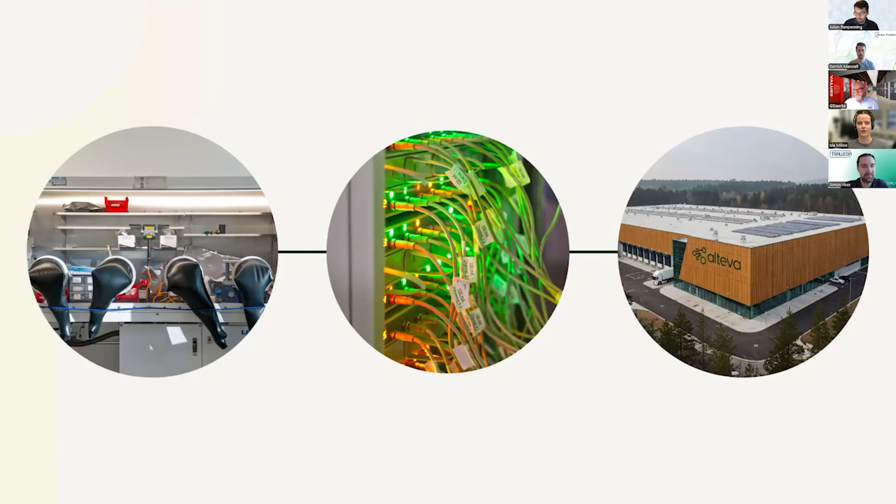So what we do really is take these next generation battery technologies and make them scalable. Basically, take what we have in the lab now and then step by step go into larger scale production until we reach these gigascale factories, because that's really what we think we can make a difference on here in Europe if we have domestic battery production again.

And the kind of technology we are looking at for these next generation batteries, especially lithium-sulfur batteries. I'm not sure how many people here are familiar with that technology. There are quite a lot of advantages to using lithium and sulfur as the chemistry of batteries compared to current lithium-ion batteries. The first one is around materials.

We actually have materials that are very abundant and available. Sulfur is one of the most abundant elements in the world. It's a waste product in a lot of industries, so it's cheap and easy to get, also here in Europe. Lithium is also not that much of a problem. So all the things we can get basically here in Europe - lithium, we have to open mines, but this is possible - compared to, for example, sourcing cobalt from Congo and so on. We don't need that anymore.

The second big advantage of lithium sulfur is that they're only one third of the weight of current lithium-ion batteries. So all the applications where weight is crucial can massively benefit from us using lithium sulfur batteries.

And those of you who are familiar with lithium sulfur probably also know the challenges why we don't see that in the market yet. And that is mostly around the lifetime of these batteries. So lithium and sulfur right now can only last maybe 50 cycles if you're lucky in the lab. There are some developments going on, but what we really have developed and what makes the difference is that we have a cathode material that stabilizes the sulfur in a way that we can make it last hundreds of cycles to really make it competitive to lithium-ion batteries.

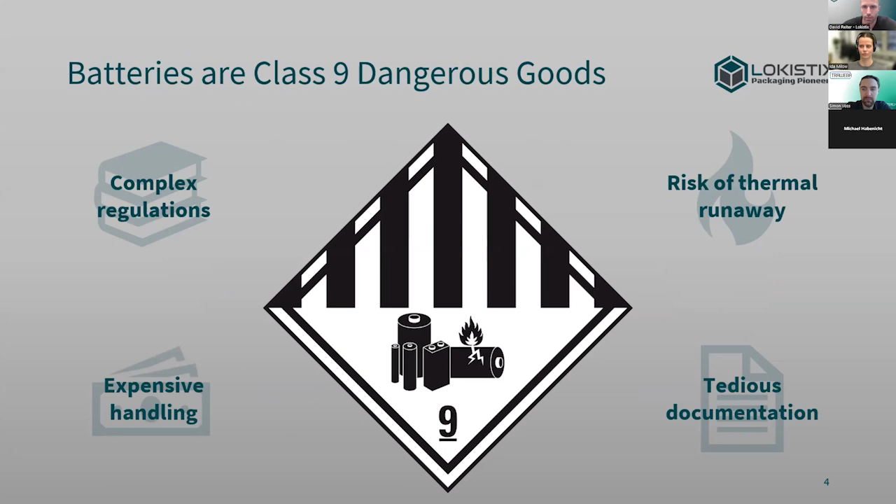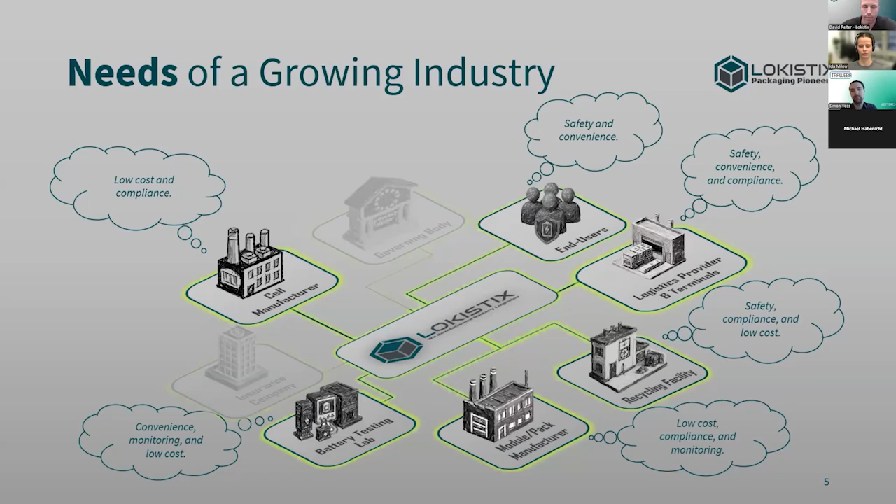We, as a packaging provider, put a lot of thought into the needs of a growing industry. We identified that cell manufacturers and pack manufacturers have a very strong focus on cost when it comes to packaging. Recycling facilities focus on safety and compliance. End users and logistics providers value safety and convenience, and battery testing labs also want to monitor the state of the battery during storage. Governing bodies and insurance companies have a strong interest in reducing risk and increasing safety, and also want to foster digitization along the entire supply chain.

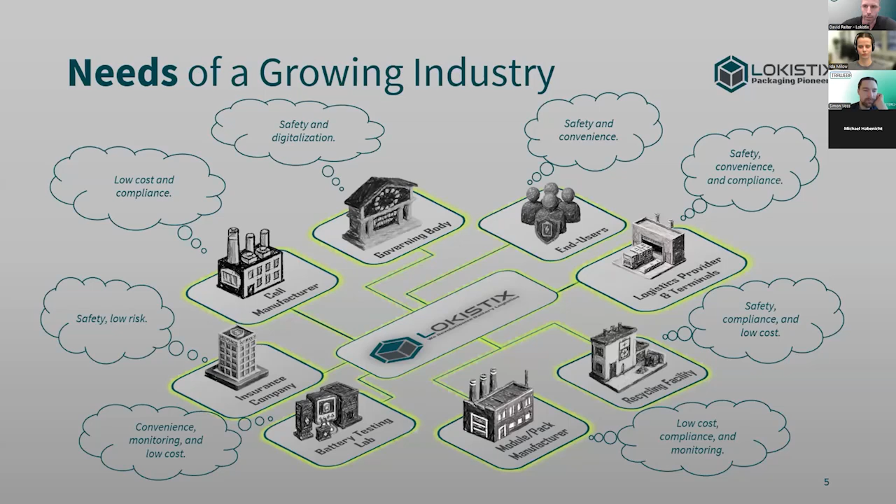To come up to all these needs, we developed the following portfolio. We have our Loki pack that comes in different sizes and different variants based on the size requirements you have and also on the ADR requirements. We can cover everything from low risk to high risk transportation.

The Loki bag is our inner packaging made of our self-developed material that absorbs thermal energy and therefore further reduces the risk of thermal runaway.

Loki TES stands for Tailored Engineering Solutions, which is tailor-made to a specific battery geometry and therefore made to reduce costs and increase efficiency for battery cell or module manufacturers at large scale.

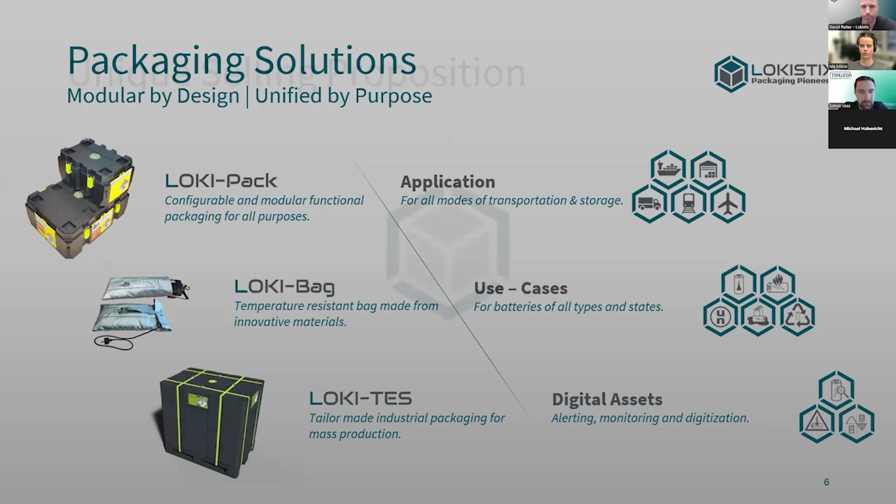All our solutions are made for all modes of transportation and storage, for all use cases of batteries from new to critically defective, and all of them can be enhanced with our digital assets enabling alerting, monitoring, and digitization of shipping documents. What makes us unique is our innovative material built into our inner packaging that absorbs a certain amount of thermal energy passively and therefore reduces the risk of thermal runaway.

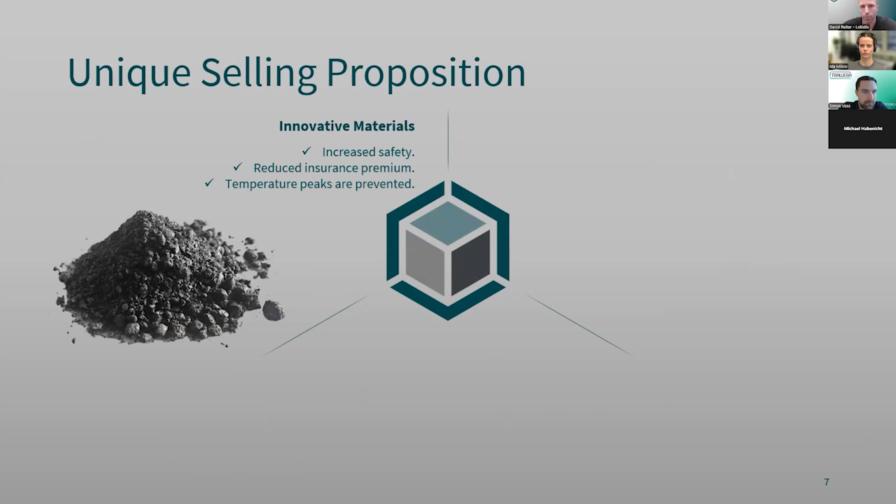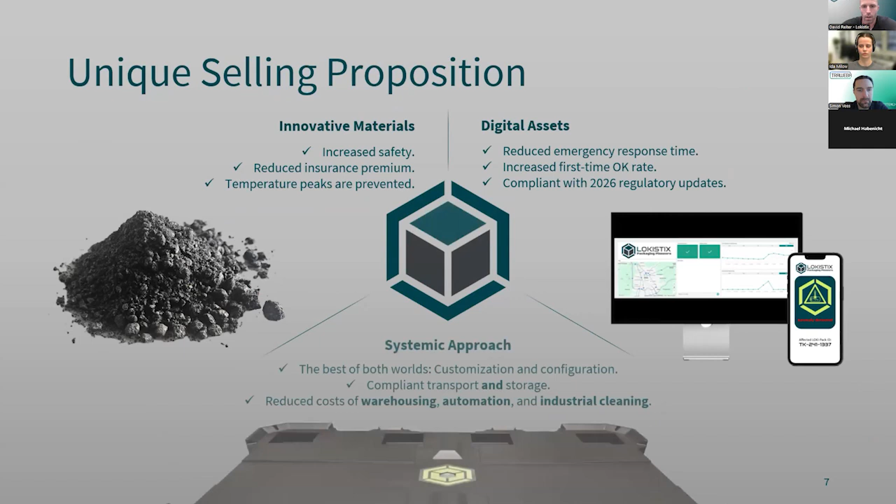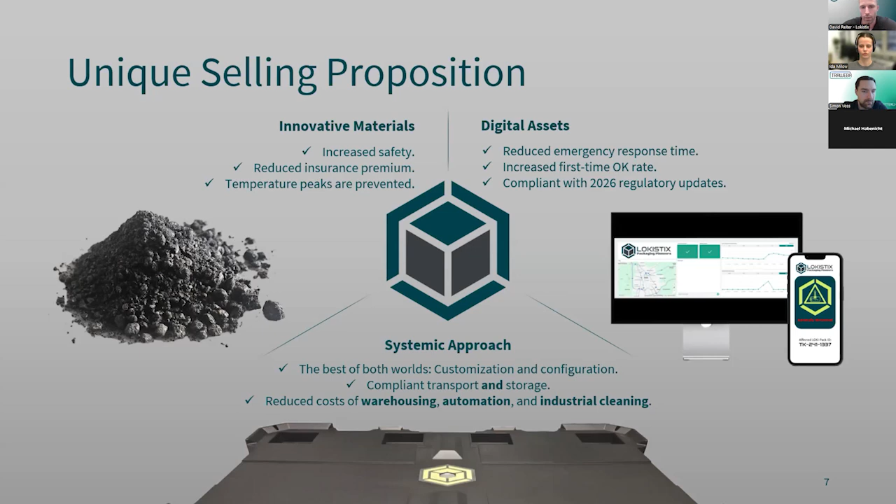We enhance all our products with digital assets, enabling alerting and also providing continuous condition monitoring in order to enable quality inspection. Also, we have a systemic approach that combines customization and configuration, so our products can be used for both transport and storage. This reduces the cost of warehousing, automation and industrial cleaning.

Our business model is a rental model where we want to rent the Loki pack for a broader audience of users and customers with different requirements. We sell the Loki bag as an inner packaging and also as a standalone product to e-bike providers and e-scooter providers. Loki TES is our project business where we work together with large customers with high demand for low-risk transportation. As I said, all our products can be enhanced, and our digital assets are subscription-based.

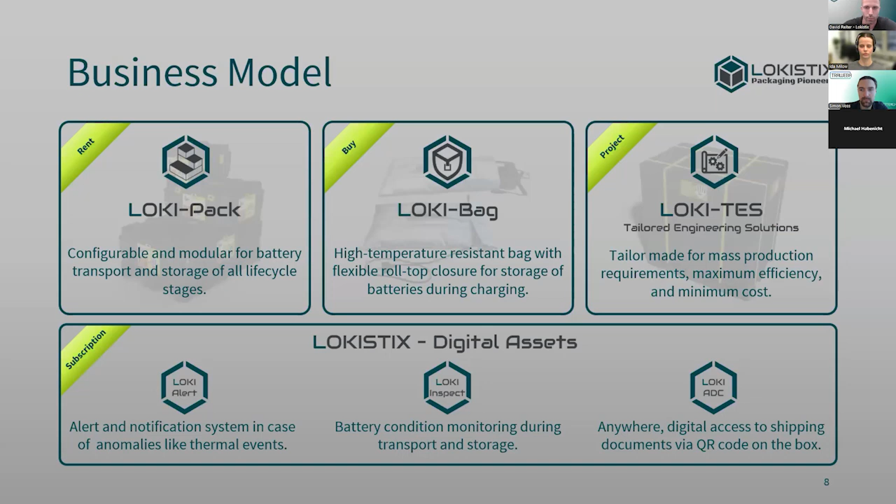With this, we see a global market potential of reusable battery packaging of 5.2 billion euros. We will initially focus on Europe, and what we can serve with our products is 756 million. With a realistic market share, we end up with 38 million by 2030.

Behind all this is myself as CEO and my brother as COO, alongside strong partners ranging from universities that help us develop and test, to automation providers. Currently we're looking for investors that support us with a bridge investment that helps us then fund our seed financing, which we're currently applying for. Also, we're looking for pilot customers, so feel free to reach out.

Thank you very much for your attention, and I'm curious if anyone has any questions.

Thank you, David, for your interesting presentation and overview. Quick question to the audience, or just prepare your questions while I ask some. Let me start with the first one. From the customer perspective, looking at the European market right now, who is most interested in your services? Who has the most demand for guidance in terms of safety, but also in terms of the digital assets, for the service that you provide?

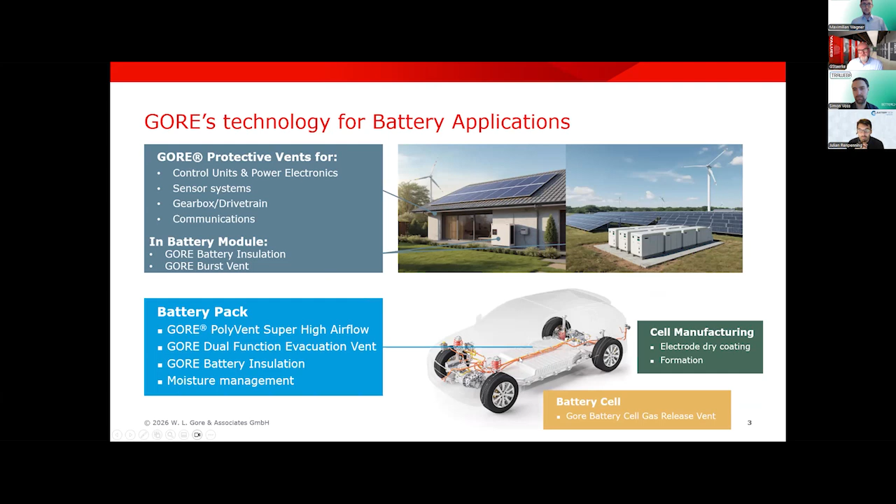We're doing this in all kinds of industry, from aerospace into the body. And we are doing this with venting solutions where we believe there's high potential for safety. Every enclosure that is sealed, from electronics, sensors, gearboxes, and more, and battery modules, we have venting solutions and battery insulations that support in this area. Not only on the residential level or the C&I and grid level, we are doing this also in the automotive industry with some other products that we have.

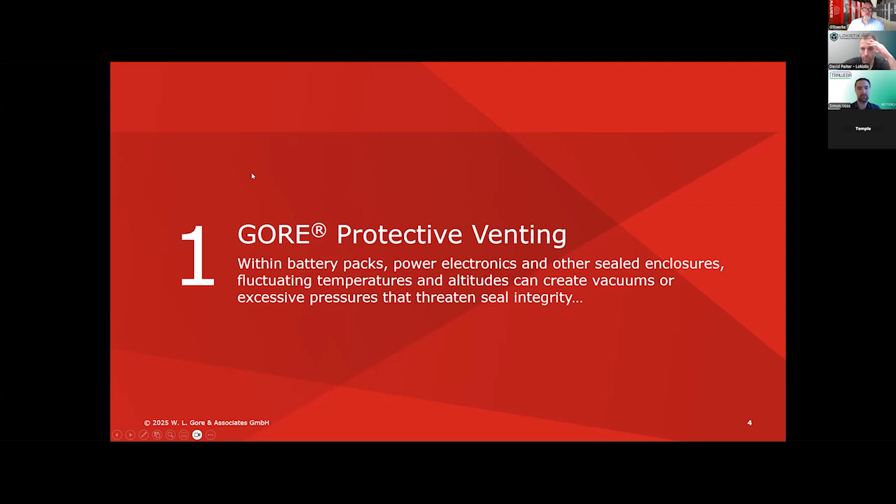So the main part that we're known for is protective venting, so within the battery packs, power electronics, or other sealed enclosures. If you're having fluctuating temperatures or changes in altitude, this could create vacuum or excessive pressures that threaten the seal integrity of the enclosure. For this, the pressure equalization helps reduce condensation in those sealed enclosures while keeping solids and liquids out.

So this is what we're known for. This is similar to how a Gore-Tex jacket works. It's breathable, it keeps you dry, it keeps your system dry, and also your battery pack dry. So we have a kind of sample where you see one of the snap fit ventings. The latest version has 3 times higher venting capability than the standards known so far.

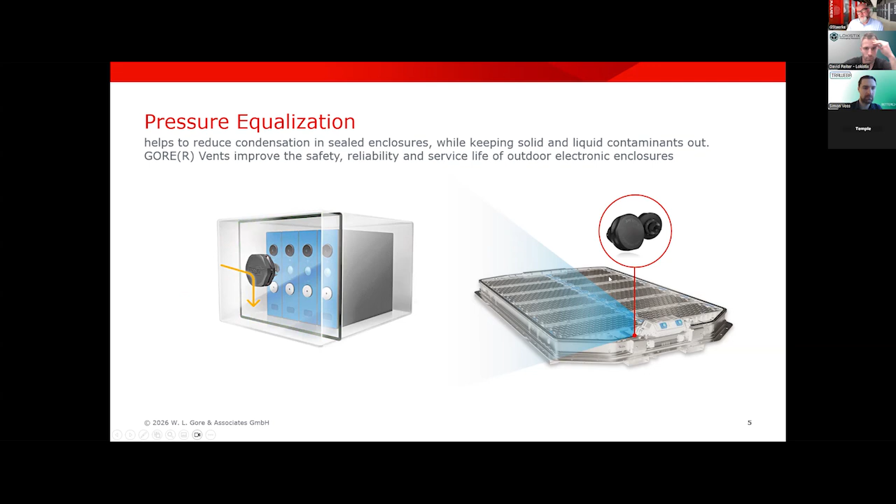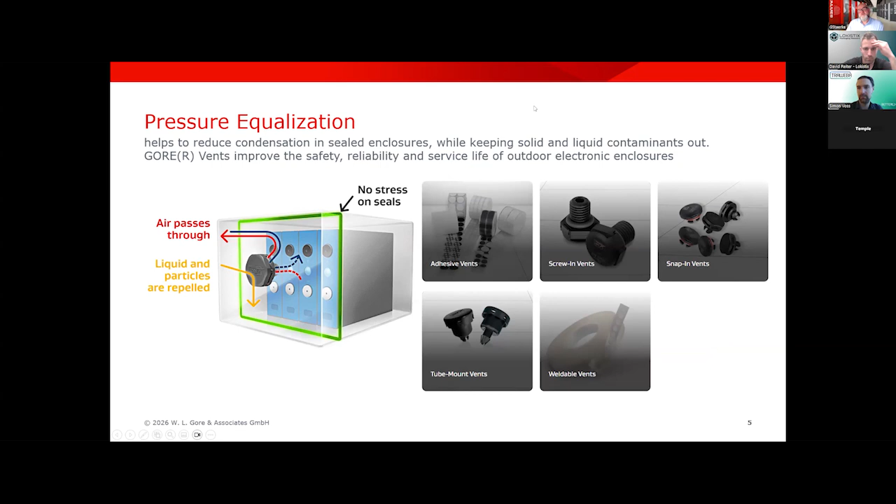We are having this also in the big battery modules in the automotive industry. We have different kinds, adhesive vents, weldable vents, snap vents, screw-in vents across all areas, up to the big screw-in ones that we're using also for energy storage. But the latest concepts that we develop for safety are 2 concepts. One is the Gore burst vent.

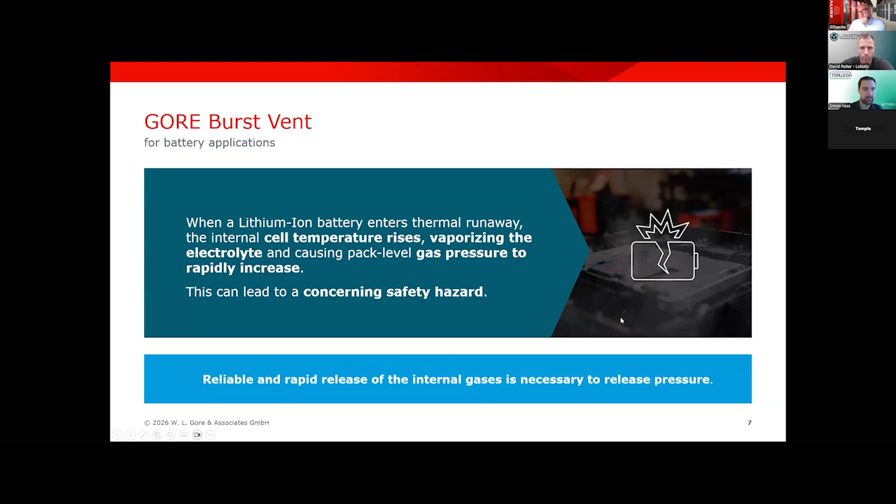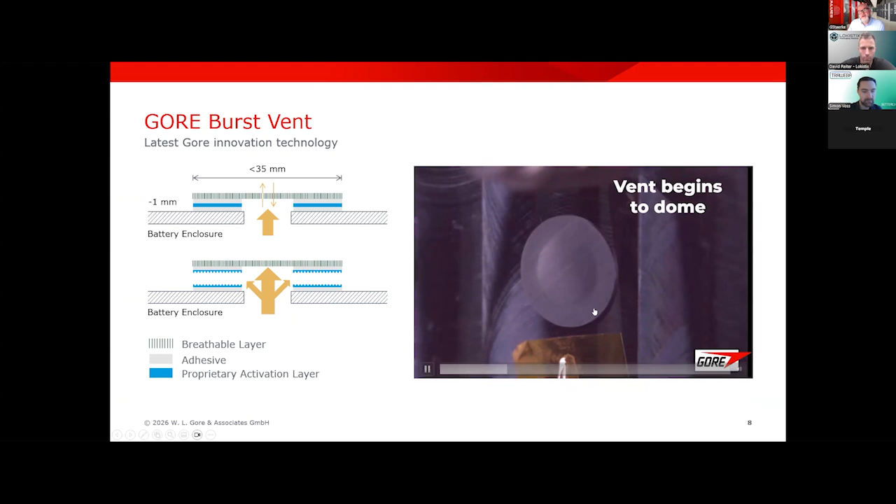And for that, we have a new invention. This is a double functional vent. What you see here in the video is a standard vent that bursts if a certain pressure is reached. There's also slow motion where you could see how the dome builds up, and then the vent bursts like a burst disc.

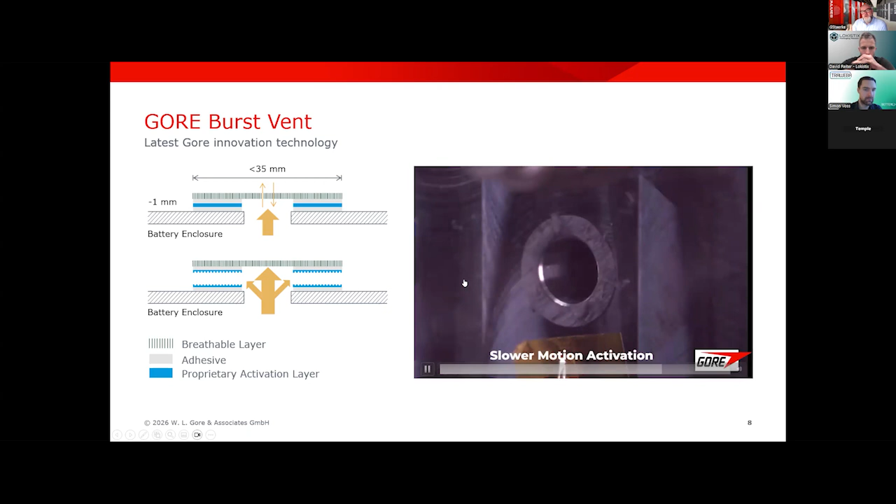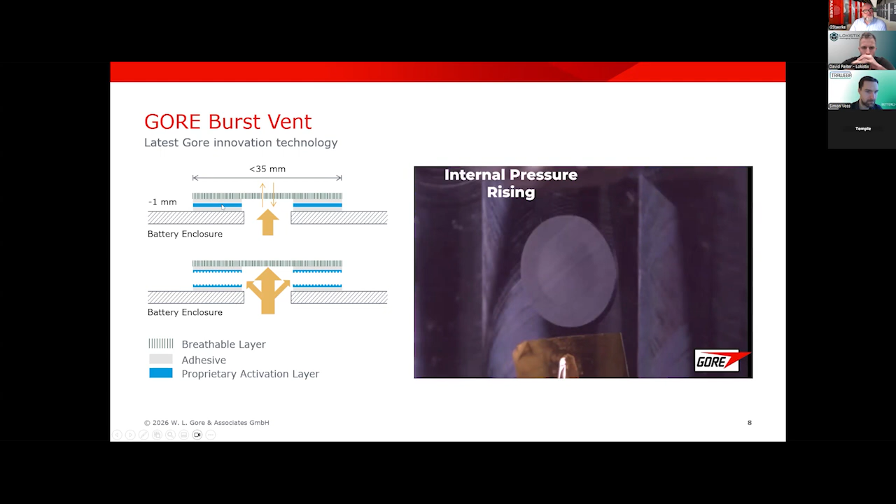But this is not the disc itself. The whole breathable layer is stuck to the battery enclosure with two adhesive layers and a proprietary activation layer. This activation layer bursts if a certain pressure is reached.

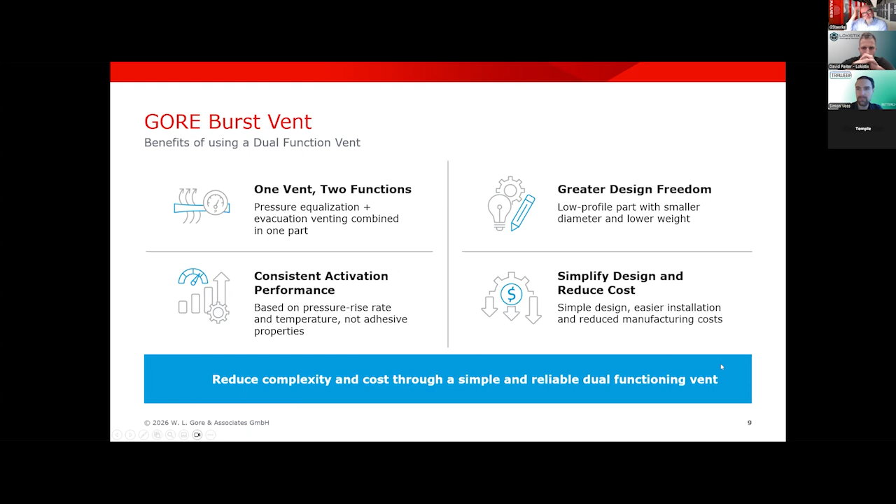So the benefit of using a dual function vent is having only one vent with two functions and a consistent activation performance, and you're having greater design freedom because of the low profile part with the smaller diameter and a lower weight. This could simplify the design and reduce costs. So with reduced complexity and cost through a simple, reliable dual function vent, we believe we could support safety in battery applications.

And the latest version we are bringing to the market for our safety concept is the Gore battery insulation. This is thermal protection, and it works when it matters most. What you're having here is a thin material, 1 millimeter thick in standard, but we could also produce it in 0.5 millimeter thickness, that has a low thermal conductivity at elevated temperatures and is stable under pressure.

So it is not compressible, or the compressibility is really low, instead of other solutions you're seeing in the market. It's not particulating, so it does not require any kind of encapsulation. It's locally manufactured in all regions, and it's bondable.

What you could see here, the material is on a reel. It's a soft material, a composite of an expanded polymer and ceramic. You see the flexibility, the highest precision - less than 100 micron thickness variability - and you could have it in roll goods for automated production processes.

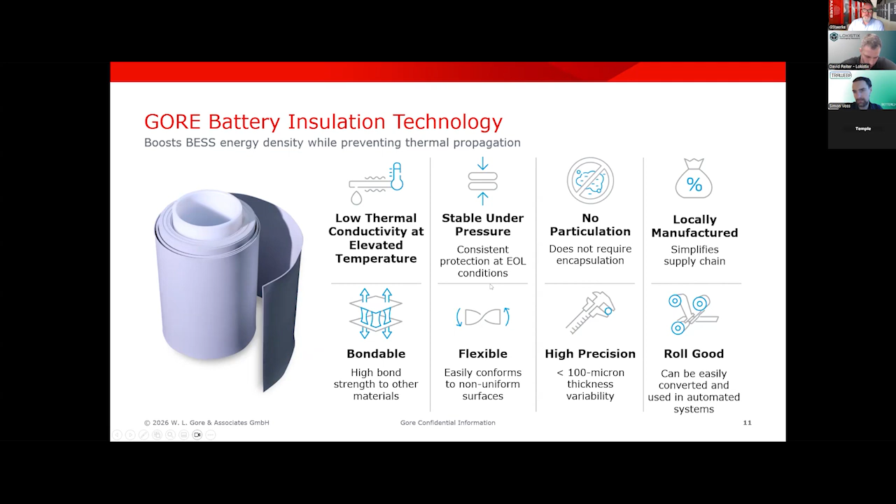To bring it to the last point, to compare it and explain why we believe it helps stop thermal runaway propagation, this material has a different behavior compared to what you're having, for instance, with aerogels. The material provides really reliable protection at high temperatures.

What you see here is a heat source trigger cell that is applying temperature. You're putting the insulation material in between and have a cold sink and the adjacent cell where you could measure the temperature too. And what you see, the temperature peak is not going higher when you use the right material.

But the most interesting thing is if you compare it under applied pressure. If the system starts with thermal propagation, the pressure is increasing internally, so it's compressing the system. What you could see here is that if you're using an aerogel, due to the compression and it getting thinner, the temperature is rising. This is the big benefit of this material, due to the fact it's not compressible.

So you have an efficient and effective tool for large format battery cells with that unique combination of thermal performance and mechanical integrity. This stops thermal runaway propagation without sacrificing energy density, so you could bring more material in because of the thickness.

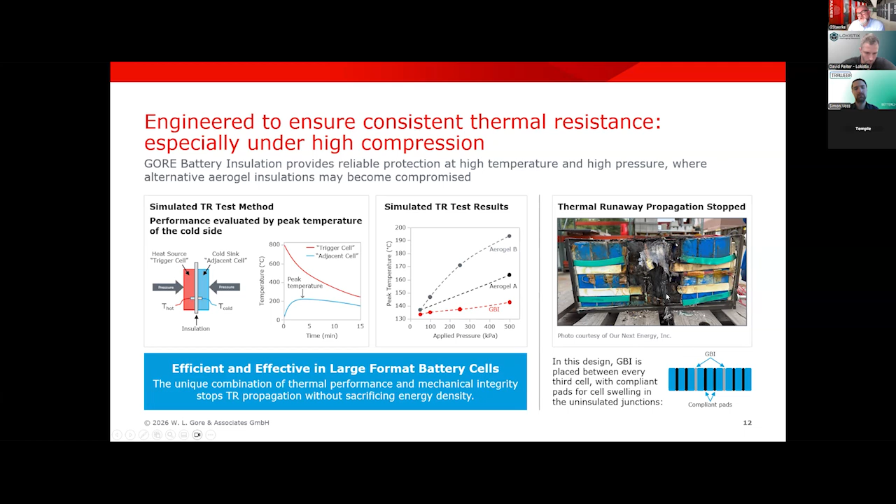As a last point, this is a picture of one of our partners that did a test. They initiated thermal propagation at the middle cell. In this design, the GBI is placed between every third cell, with compliant pads for cell swelling in this case, and in the uninsulated junctions. What you could see here is that although thermal propagation was initiated, this material stopped the thermal propagation at this point. So this was more or less everything in a nutshell.

Hi guys, thanks very much for the introduction. I'm glad you had first-hand experience with the system I'm showing here. Just a quick introduction, because this isn't actually about our core system—I'm Dr. Richard Fields, Managing Director of Cellerate. We build automated equipment for battery research, and I'm going to show you some of the new pilot scale production equipment we're making as well.

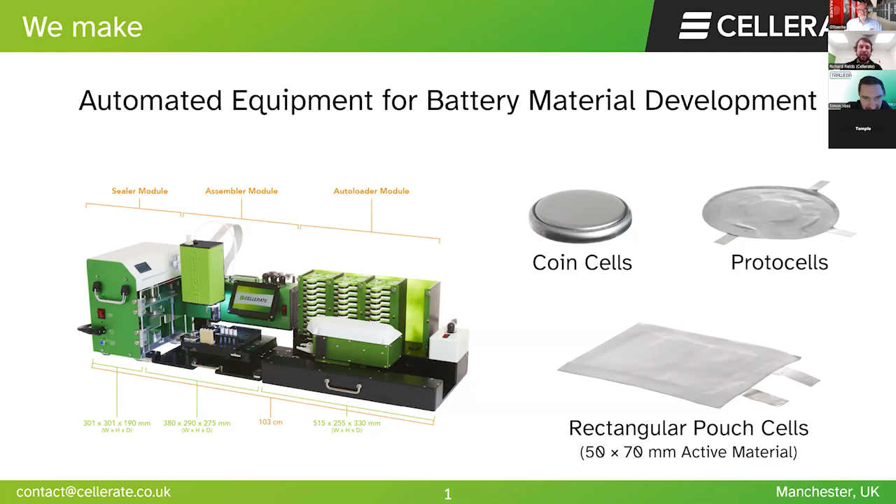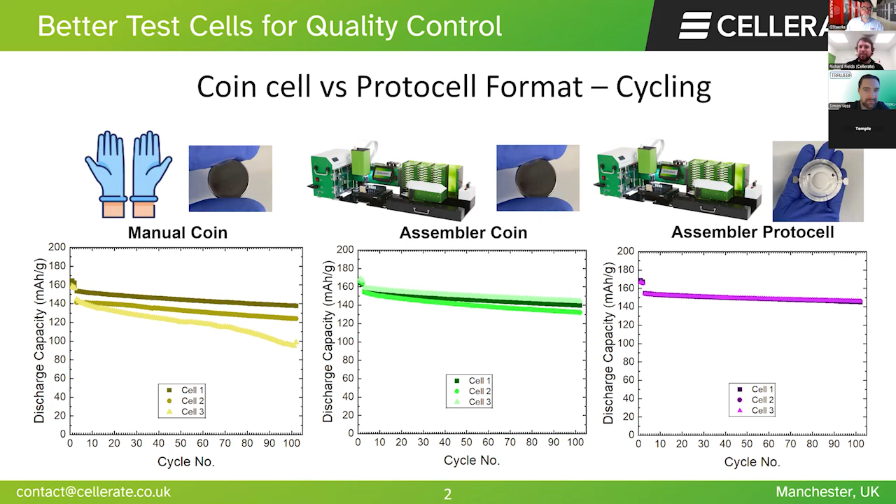In the work here we've developed, this is mainly traditionally for automating the cell assembly of coin cells and single layer pouches. We've demonstrated that we can bring significant benefits to the R&D workflow of advanced materials, particularly with our new protocell format. If you're interested, contact me—but I'll show some more things. Now I'm going to talk about the new equipment we're making and the type of market we're exploring with it.

This is around making batteries which fit the application. Currently, when you design or have an advanced or demanding application, you have to make sure the battery is designed into it—you design around the battery. It's very difficult to get a battery that actually occupies all of the available space in the application. And everyone's looking for more power, more energy, longer lifespan.

And the big challenge—this challenge will persist until what I would say is the end of time—because even if you develop advanced chemistries as much as you want, they're going to plateau at some point, and then you just have to fill all of the available space with the battery. So we're jumping to that end stage where you can start filling all the space with the battery.

Currently, you can make them in cylindrical or rectangular cells, cuboid cells, pouch cells in this case. But we're starting to make cells of different shapes and sizes, and we're doing this at low cost and on demand. So effectively, anyone here can soon log on to our website and be able to order a custom shaped battery on demand through a generative quoting system.

And then we'll do the automated manufacturing in our new facility on demand, effectively. So this is making sure that the battery can fit into the application, that you can use all of the available space.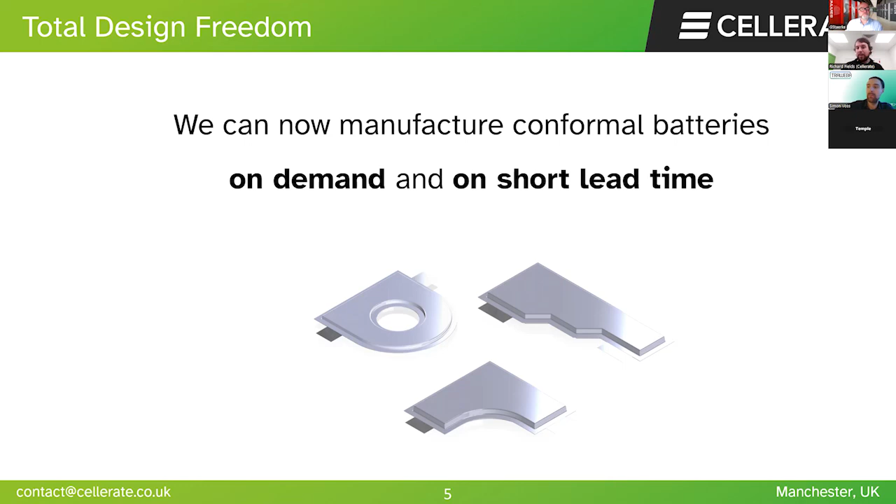To do this, we've started developing and manufacturing equipment. We're both building the equipment potentially for sale and for internal operation, so we'll be learning and improving it to make the best batteries. For organizations who want their own capabilities internally, we can also provide for that. This is small footprint, laboratory scale equipment that can build custom shaped batteries, and we're building bigger systems down the road. Here you see the roll-to-roll electrode cutting system and also a stacking system.

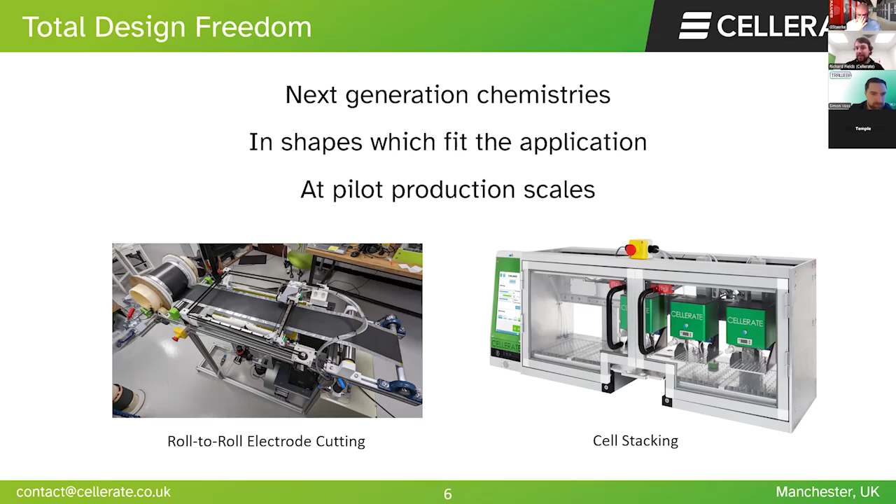Generally, that hopefully gives you some ideas and inspiration of what Cellerate can offer. It's mainly around automated battery research, material development, and now cell production. We're looking for end users who are constrained by the batteries they have and want to put advanced chemistries into filling all the space available. But also those looking to demonstrate new cells using our platform, as a route towards early adoption of those cells in low volume quantities where you can demonstrate it in the applications.

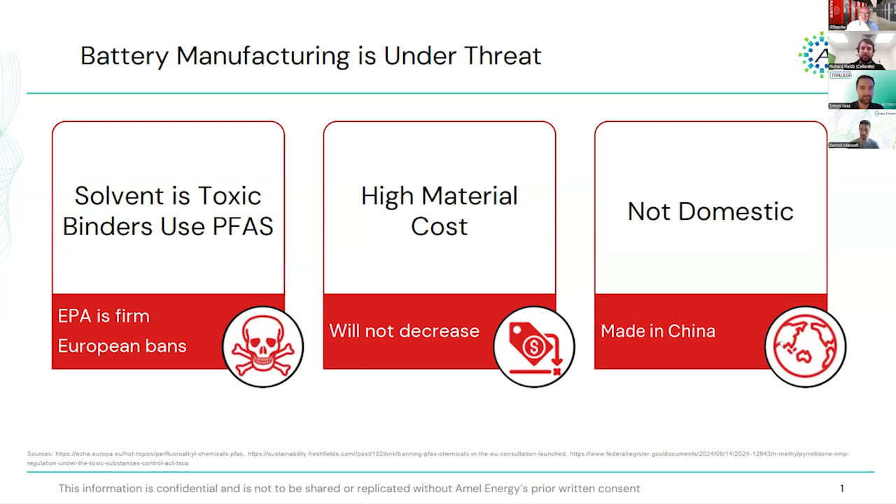And these materials are expensive—they're not likely to decrease in cost. Typically this is a US focus, so they're not domestically sourced, and most of it's made in China. So our approach is that we are using a non-toxic solvent that's bio-based. It's generated from corn feedstock and biofermented, and it's made in the United States.

That non-toxic solvent is paired with binders that are PFAS-free, which avoids regulatory issues and enables fast-track permitting processes for new plants. It's also reducing cost. Our solvent approach is two times cheaper, and the binder can be up to ten times cheaper, so instant savings could be realized by customers through a domestic supply chain.

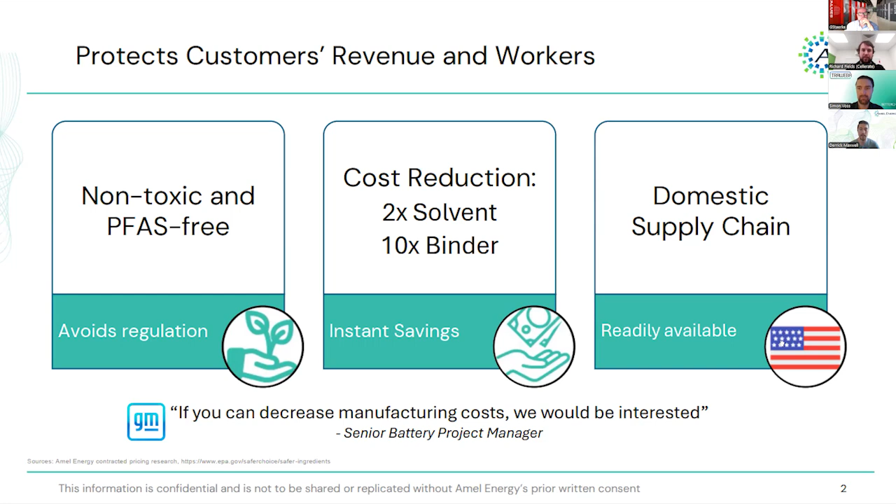This is especially important for the United States right now, but we're very open to seeking partnership with Europe. There's no issue in terms of exporting materials, and we're also looking into the option of setting up manufacturing sites in Europe to service customers.

To speak a bit more about the materials, the company itself is a materials company. We're not a battery company and not focused on manufacturing batteries. We actually want to sell the solvent and binder as a package to our customer, which is a lithium-ion manufacturer. Right now we're looking at a second generation approach where we pre-combine our polymer and our solvent together to sell to the customer. We have future generations and novel chemistries we're working on.

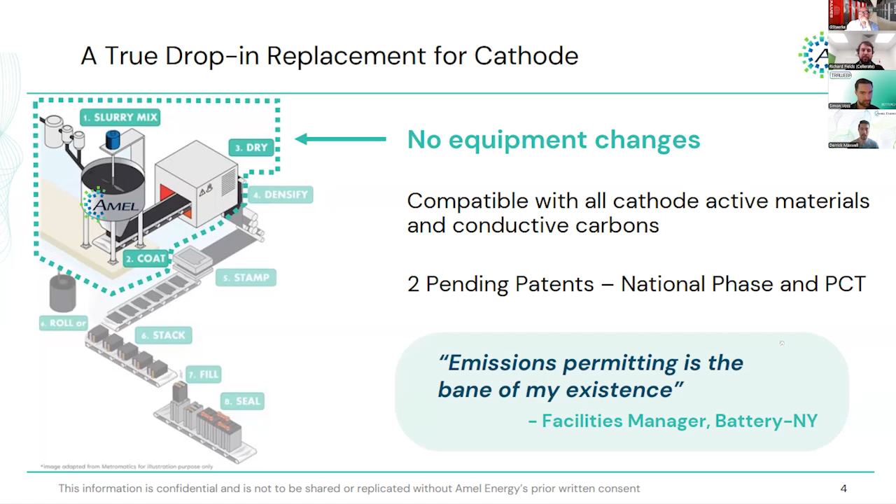This is designed to be a true drop-in replacement for the cathode. It doesn't require any equipment changes, so no CapEx is required to adopt our materials, and it's compatible with everything that can be put into the cathode. No coating on the cathode is needed, and any conductive carbon, CNT, or carbon black can be used. We have two pending patents protecting this approach, wholly owned by the company.

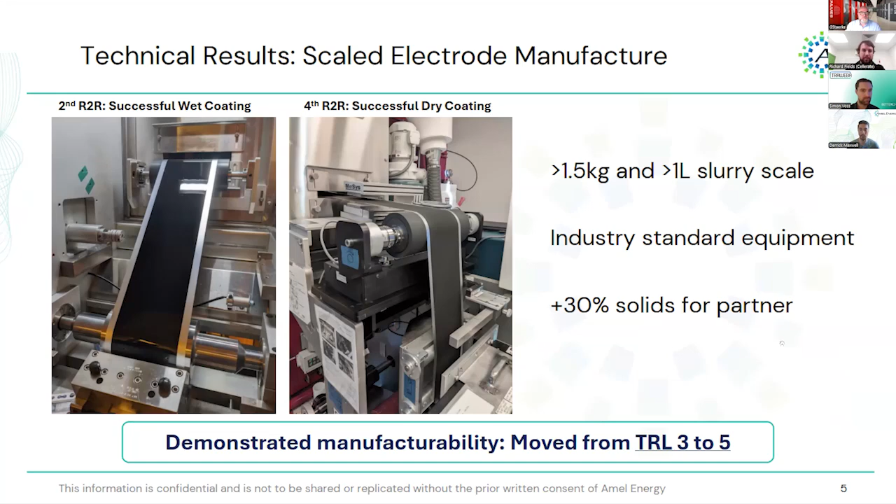We actually brought this to pilot scale. We're coating here in the United States, in Massachusetts. Our flagship university is the University of Massachusetts, where we have access to a roll-to-roll coater. We've scaled to one liter and are able to show, with industry standard equipment, movement to technology readiness level 5. We further were able to build pouch cells.

These are about 80 by 100 millimeters, totally NMP-free, PFAS-free, made with NMC811 paired with a graphite anode. We had no major construction issues, and we've hit our targets for the year. We're supported entirely by grants.

Massachusetts has a clean energy center, and in New York State there's the Energy Storage Engine, funded by the National Science Foundation. We have our first signed letter of intent to supply Custom Electronics Inc. as our first customer, and that's a granted, funded pilot.

We proved, within about six months, going from coin cell performance parity against PVDF to pouch cell testing, that we're able to scale. Now we're looking at this pilot where we're working with the customer to introduce our materials into 18650 cylindricals. We're looking at building out our R&D center, increasing hiring, and also accelerating business development. This is where Europe is really important to us, because we want to move from our established beachhead of DoD contractors in the States to be able to service European customers.

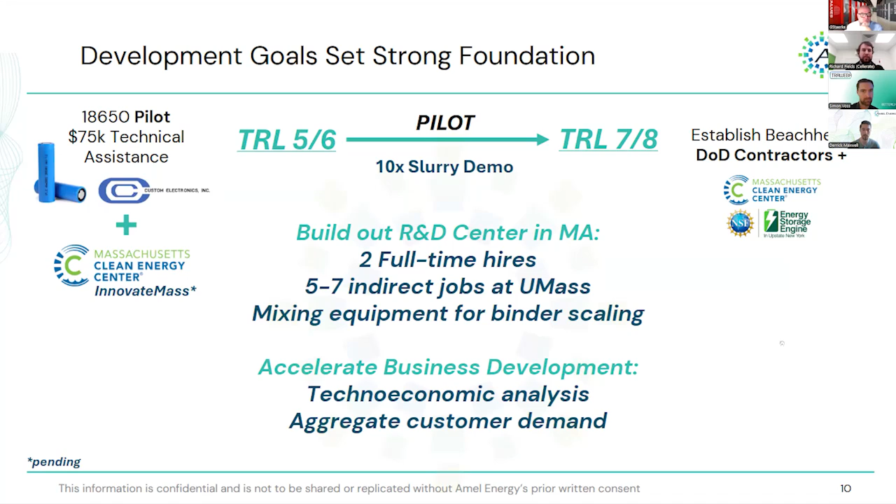We think we're really well positioned to do that. We're supported by what we call the battery capital of the United States, which is in upstate New York.

I wanted to pull attention to why this is important for Europe, because we're targeting entering European markets and working with customers between 2027 and 2028. Right now we're focused primarily on the United States, looking at early adopters, but we're very open to working with any pilot applications within Europe.

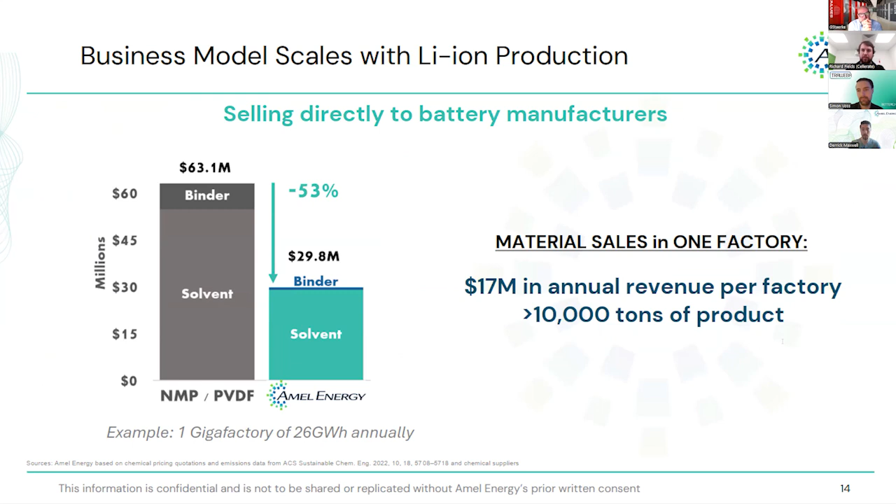The reason why is because the European market for solvent binder is going to drastically expand our ability to obtain revenue. As mentioned, our customers are lithium-ion manufacturers, and we're looking for anyone within Europe interested in moving away from PFAS and NMP. We can show, as a business model, that for one typical-sized gigafactory we can save 53% on materials cost, which would generate significant revenue for Amel Energy. Further, we reduce greenhouse gas emissions by up to 70%, which is really important, especially for reaching carbon negative and carbon neutral goals.